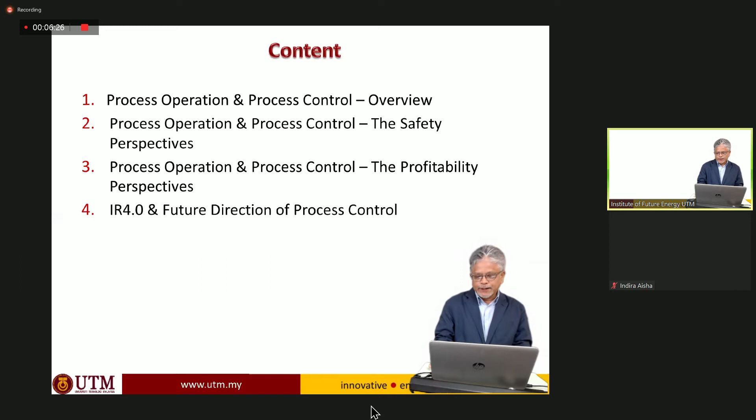Sorry, I got some technical problem, I need to use assistance now. Okay, next.

Before we move into process control, let's define a process. I think you will be familiar with it. A process is basically one where we have input and we have output. Input can be in the form of raw materials, and whatever the output is, we can call it product. To some people it is waste. Waste also has a purpose - some call it waste, but others call it byproducts, because anything that comes out of a process can be reprocessed and transformed into another form of product. The only difference is whether it is economical or not. Then there are processes that require energy, and there are processes that release energy.

So we look at a process in a broad example. In the classroom we look at tank, reactor, distillation column as a process. But in reality, a car is a process. Our human body, our body itself is a process. It consists of many different unit operations.

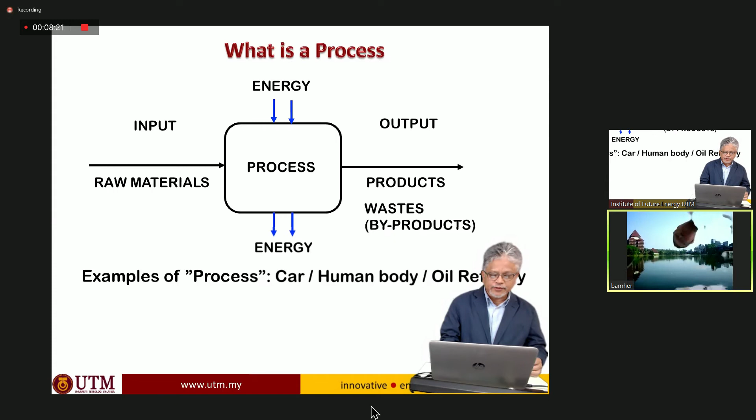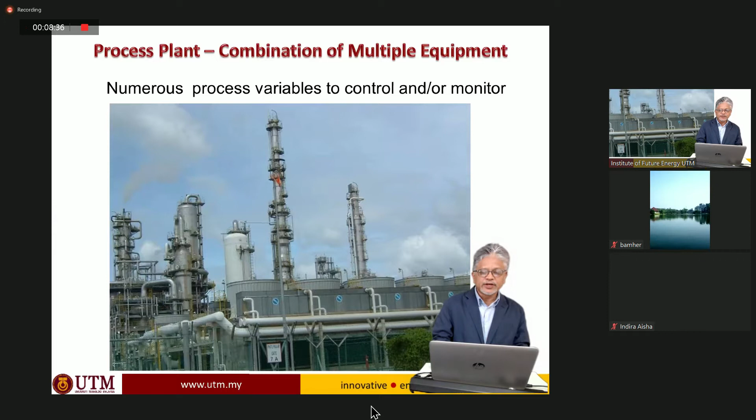Okay. For example, this is a gas processing plant. Complicated, complex, consisting of many different distillation columns and some other equipment integrated together, and all has to be managed.

In a typical situation, the process plant basically has many different objectives. The bottom line is money, but at the same time, the plant must protect people - the plant operation must protect the workers, the people in the surrounding. The plant operation must protect the environment and the equipment. We don't want the equipment to be damaged, and it must maintain smooth operation.

Nobody wants a shutdown. One shutdown costs millions for a process plant, and we need to achieve the product rates and the quality. If the quality is not met, you cannot sell your product, and that is a failure. In order to increase profit, we need to optimize all the first five objectives, and then we have the monitoring and diagnosis, trying to identify if there are any rooms for us to improve the process further.

These are all achieved through process control. Without process control, we will not be able to achieve this. Somebody may say, in the old days, the plant operated without any of this sophisticated equipment. Yes, but in the very, very old days, the plant may operate, but the controller is basically a human being.

It's manual control. Decision is made by a human, a person, then the manipulation is done by the person, so everything is done by human. Then it gradually got replaced by machines, equipment, and today we have so many different digital devices that are used to operate process plants.

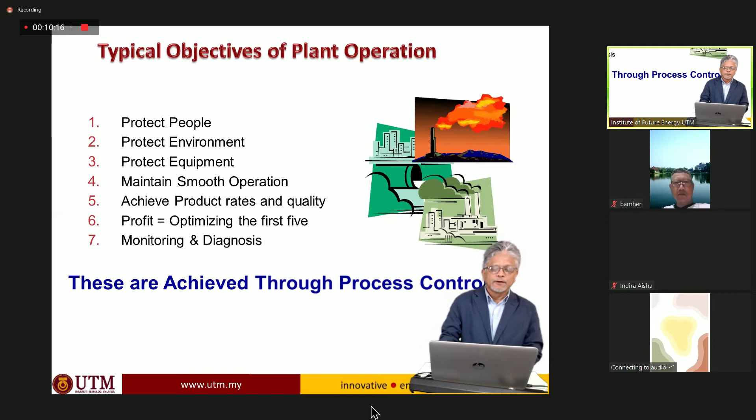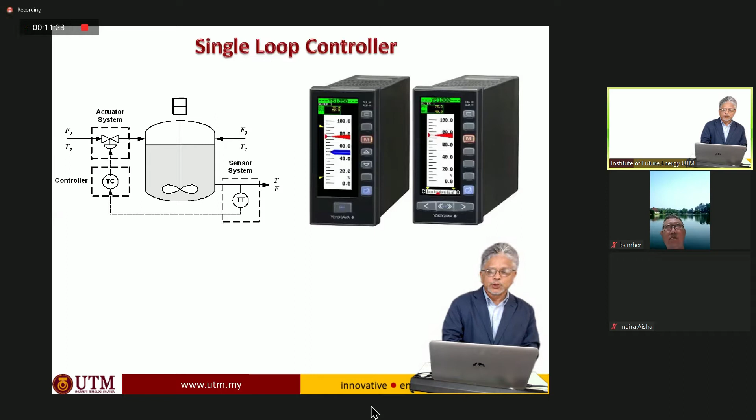Okay, and if we look at how the industry gradually grew, in the 1980s the DCS was introduced. DCS was introduced in the early days - there were plenty of Honeywell DCS, and Yokogawa mostly, then so many different players came into it. DCS is basically a system where there is a common shared communication facility.

We call it a data highway, and then measurement from the process plant is collected and transferred into the data highway, and the information is shared to the host computer, where the host computer will be doing all the calculation, and then we have another computer as a storage unit with different software.

For example, there was software that used to be popular, like one called PhD, and another one called Pi, which was very popular in those days. But today the scenario is slightly different as cloud computing and remote application is growing - we will talk about it later. Then we may also have a PLC attached to the system. So this is DCS architecture.

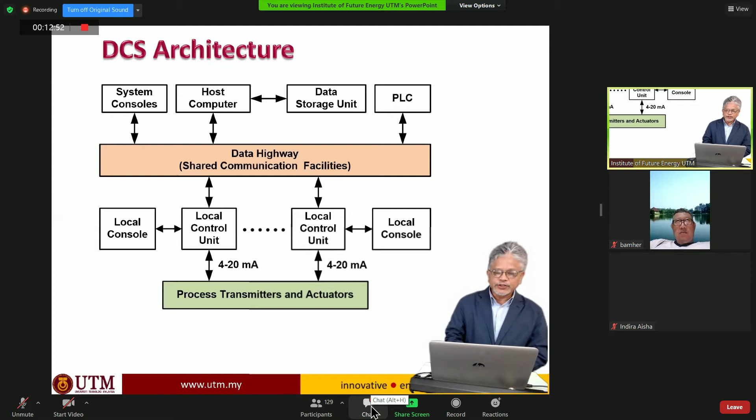And then after that we have a few other technologies developed. We have digital technology - as it developed, DCS transformed into a digital version. This came in the 1990s, first introduced in the late 1980s, but it was slow until the 1990s, when standards were introduced by IEC for functional safety, and for DCS, and a few other standards were introduced.

Then fieldbus application - by the way, fieldbus is basically mostly the product name used by American products. They call it fieldbus, or we can have some from the European side, from German - they call it Profibus. Essentially, it is the same.

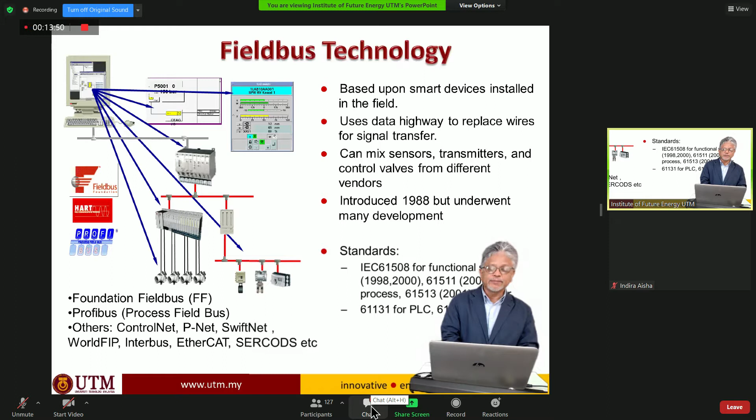Okay, it is basically similar to the DCS. It has the same function, and it has the same shared data highway, but now in the form of digital data, with high-speed Ethernet, and we can have many different local area networks. So if you go to a cyber cafe, we can visualize there is a cluster of computers wired together as one small network, and another wired together as a small network for a large facility. So the process plant may also work that way, where certain areas of the plant are managed through a local area network, and another through another local area network, and the networks are connected together, then sent to the host computer for the overall manipulation or management of the system.

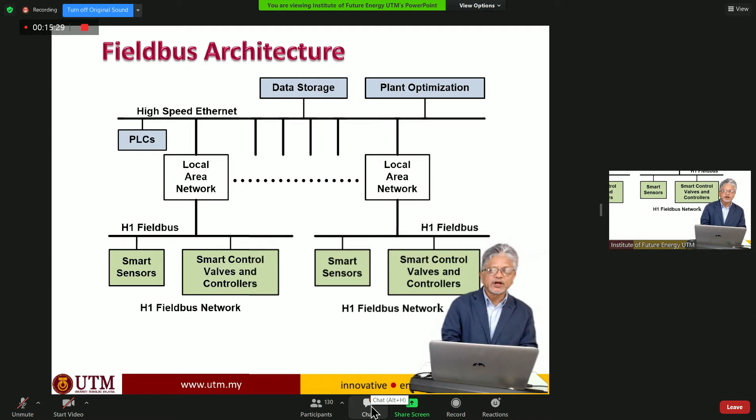So I asked one of my friends once - he was developing, basically installing a new field bus system at his plant. He was a plant manager at that time. I asked him, what is your main motivation to replace the old DCS with the current one? Instead of using the normal DCS, he decided to use the field bus system for his second plant. He was running one plant, so they were doing plant expansion. For the second plant, they are installing a digital field bus system.

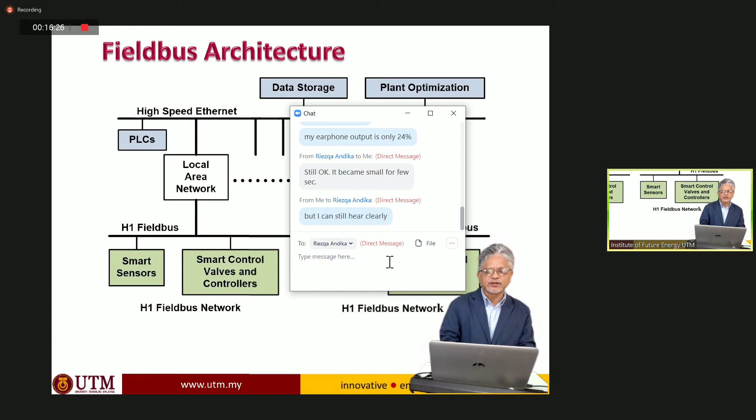Interestingly, what he told me was that when he did his computing, his calculation on cost, they found a lot of saving on wires and a few other things. A lot of saving on wires, because now we do not need so many wires for different measurements, different signals being sent, and so on. Now the wires are all just one computer cable connected to various different devices and going to the computer. Being in that manner, it's easier to isolate the plant, and so it's easier to manage. This gives an advantage to the process plant on overall management, where it can be a little bit easier to have partial shutdown compared to the old system.

Okay, that's basically the scenario. Today, all the new plants, I would say, would use a digital DCS or the field bus or Profibus system. But we do not want to compare this to some of the small industries where everything's still manual. Even today, there are still some with single loop controllers. The single loop controller and the sequence is managed using PLC, and the overall management is done through PC. So PC, PLC, and single loop controller systems still exist in the industry today, even till today. But in sectors like petrochemical, oil and gas, and so on, we are looking at all the new ones with digital DCS, like the field bus or Profibus system.

Okay, now let's look at the safety. Let me see, something is missing. It jumps - the slide jumps very quickly to 3 pages.

When we look at the safety perspective, this is what we have - the typical onion kind of drawing, normally found in class lecture notes. In my class lecture notes, I think I found this original diagram. The idea I took was from the website of a Canadian professor by the name of Tom Marlin, the author of a book on process control. So I like his presentation, and I use it since then.

At the heart of the system is the basic process control system, BPCS, or I put it here as control. So anything on the plant operation, the automation is managing the plant. Control will be making sure that all the process variables are maintained at the desired set points - that's the most important item. We set the set points for pressure, temperature, flow, concentration, and whatever variables we have for the process plant. For all the equipment, for one plant, we can have maybe 100 or 200 different controllers, so many hundreds of control loops, and these control loops need to be maintained at their desired set point of operation. That is managed by control.

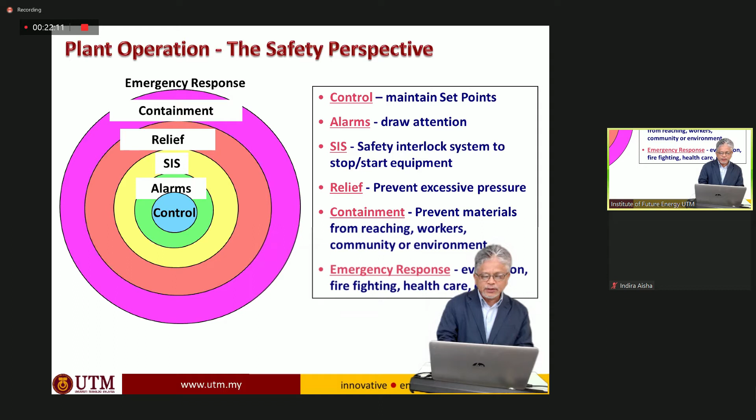So if we look at this example which I've shown earlier, let's say we consider a flash separator, V3. As you all know, a flash separator is basically a simple device, just a tank that receives a saturated liquid. As the saturated liquid flashes into a bigger volume, there is a sudden expansion, and by thermodynamics, reduction in pressure at constant temperature will cause the vapor to vaporize and the liquid to remain in liquid, with the heavier component remaining in liquid.

So we have a separation where vapor goes to the top and liquid goes to the bottom, and the separation occurs in a single stage. In fact, if you look at a distillation column, it can be visualized as a series of many different flash columns. Prior to that, we have 2 heat exchangers, E1 and E2. E1 is basically a process-to-process heat exchanger just to recover some heat. E2 is the utility heat exchanger to bring the temperature to the desired set point.

So if we look at this particular plant, how many control objectives and how many control loops are needed? Okay, let's come to process control.

You know, we are in academia. Every year we supervise students in plant design. They have studied all the subjects in chemical engineering, and now they are building or designing a process plant. So we look at the control loops that they design, and we will find so many loops. I remember one of my favorite questions to my group would be, can you show me which valve will be damaged first? The student will say, what? I don't understand your question. But then normally I will just laugh it off and let them figure it out and tell me next week.

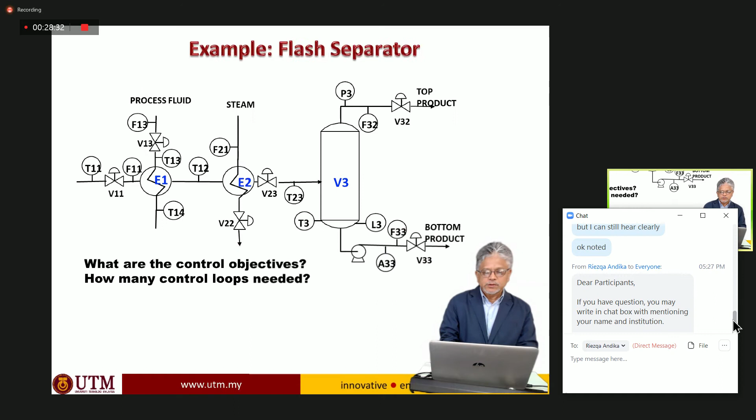Okay, so then we have these 3 things, and I'm trying to figure out what disturbed the cursor. Probably because when somebody is coming in, my cursor doesn't work anymore. Okay, so I'm sorry for that.

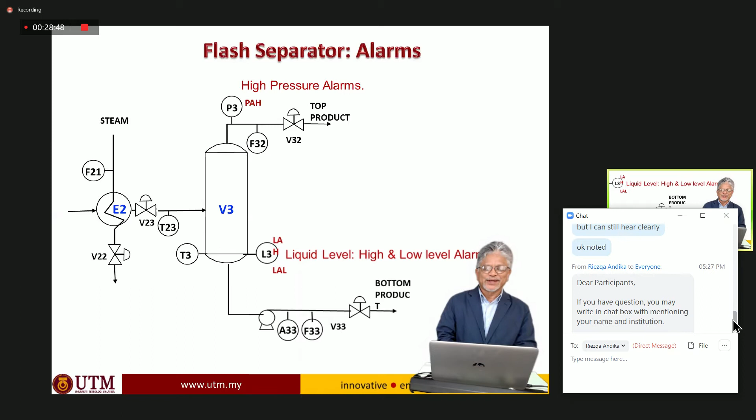So that's the alarm. And at the next level, we have interlock. An example of safety interlock in this particular case is when the level is so low it has reached a danger zone for the equipment in order to protect pumps. So we put a low level switch, and that will basically stop the pump from operating. This is an example of interlock.

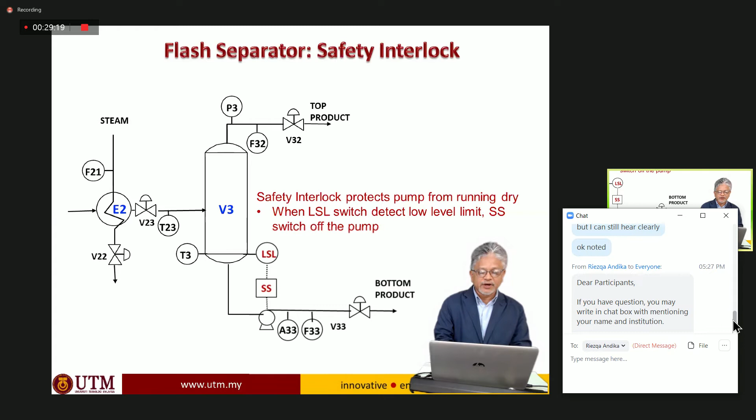Then we have a relief system. In this particular case, we have an example of pressure. So if the pressure is excessive and even the interlock cannot manage it, then we have a relief valve to reduce or prevent the pressure from going excessive and causing potential damage to the system or even potential hazard to the plant as a whole.

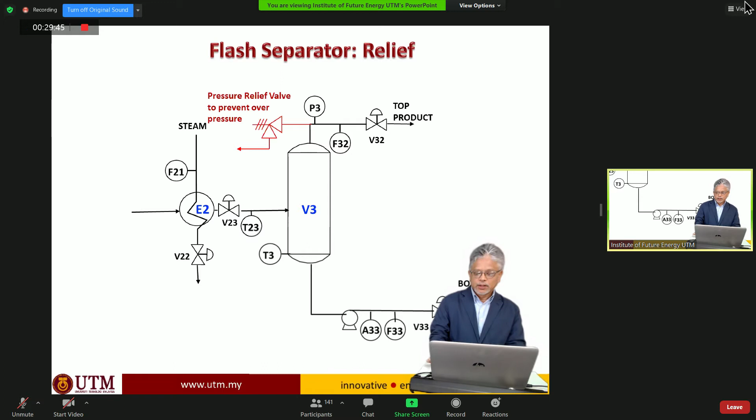So that's basically the layers of protection available in terms of automation: control, alarm, then interlock, then relief. The rest is basically management.

It's a fixed asset, static devices like berm, containment, and shower systems, dispersion prevention devices, and so on, like blast wall, firewall, all those things. And then evacuation as a management requirement to complete the 6th layer of protection.

Now, the current requirement in the process industry is that after the standards of process control were finalized in the 1990s, the industry is basically working on 2 redundant systems. One is managed through a DCS system, which handles all the controls and alarms, and another one which is a system that is operated redundantly.

Ideally with a separate power unit, with a separate backup system for it. The UPS for DCS and the UPS for SIS should be separate. When we do a hazard study for a plant, we need to make sure that we have complete redundancy. The system must be completely independent from each other.

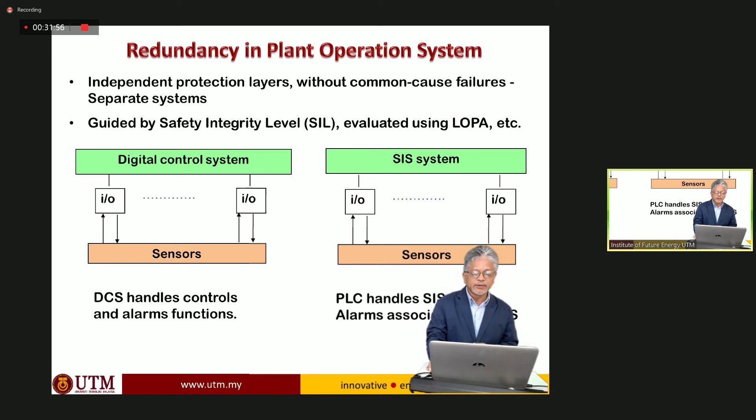Okay, so finally that's the final setup, which is normally used in the industry. Now, for part 3, let me check time. Okay, it's about half an hour now.

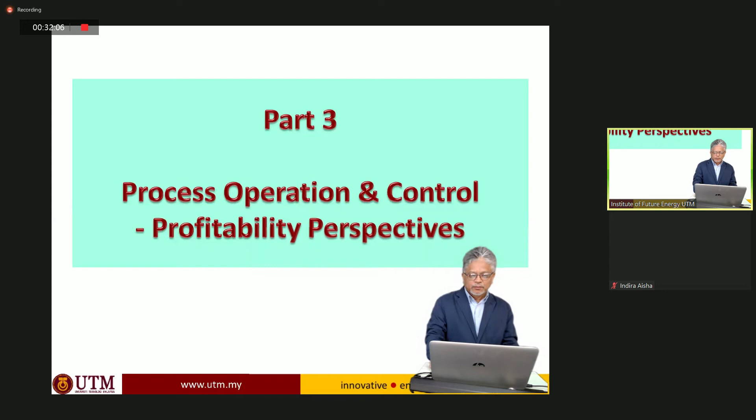Process operation, control and profitability perspectives. Let's look at the profitability perspective. Basically, a 1% saving or 1% improvement of performance is not a small number. A 0.5% improvement is also not a small number when we talk about refinery, because refinery is not an easy industry. The profit margin is not very big.

The oil price, the raw material price fluctuates significantly, and the product price also fluctuates, and these two fluctuations somehow make the oil refinery difficult in terms of profitability. We may have a lot higher profitability margin if our operation is further downstream. As we move towards downstream, the profitability margin will be much better, because the product is generally more expensive compared to the raw material, and the amount normally will be smaller. But this is in the case of bulk chemical processing, like a naphtha cracker or gas cracker. In a refinery, the profit margin is not very big, but a small percentage is a huge amount of money, because the throughput is large.

So when we look at this particular hierarchy, at the bottommost we have the process, what we were talking about just now, the basic process control system, all the control loops. Then at the higher hierarchy we have advanced process control. The industry likes to call it APC, but in academia we use different names: generalized predictive control, model predictive control, dynamic matrix control, adaptive optimization system, and many other names depending on the algorithm.

But generally in the industry, they just call it APC. What is the APC? They say, okay, we use RMPCT, the Honeywell product, or we use an Aspen product, or we use Siemens. That's normally the kind of language or terminology used in the industry, so I put it as APC, advanced process control, which coordinates for better control performance. I will dwell on this in slightly more detail later.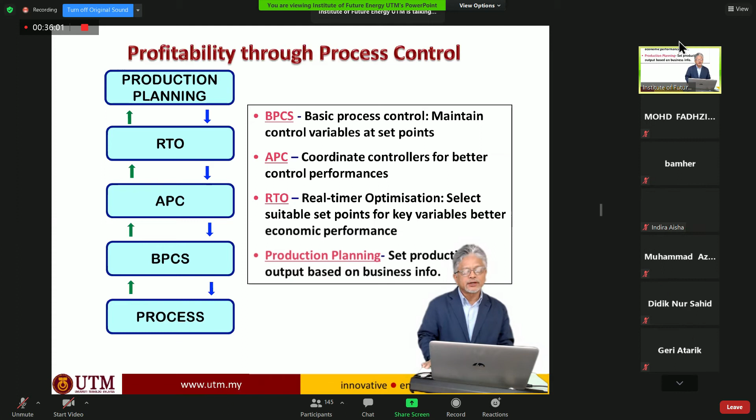Then at the top is real-time optimization. The purpose of real-time optimization is moving from one operating place to another; I will also explain this slightly later. At the topmost is production planning. In the old days, in the 1990s, these were not connected. It was just manual department, manual task. Production planning was done separately in a separate department, and then the requirements or production rates were set by them, and the plant operation people operated the DCS based on the requirements set by production planning. Today, a lot of systems have been integrated where planning and operation work together.

Okay, look at the operating window. When we want to talk about optimization, we look at the operating window. Consider this simplified one; the real operating window is multi-dimensional, so I have only 2 dimensions in my drawing. Just imagine, for example, that pump capacity is one of the constraints, heating capacity is another constraint, maximum pressure is another constraint, maximum temperature is another constraint, and there are many other variables that I put as a question mark.

So there are many possible constraints set by, maybe, equipment limits. If you go beyond this, basically it cannot deliver anymore; it has reached the limit of the equipment, or sometimes it may be a limit of the process. If you go to a higher temperature than this, we may get a runaway reaction, so it's a very hazardous condition. A combination of process constraints and equipment constraints sets the operating window.

And the optimum condition that I put as a pink bubble within the area, that's probably the current optimum operating condition. At that current optimum operating condition, it has a set of set points: what is the pressure, what is the temperature, what is the volume, what is the liquid level for this equipment, for that equipment, and for many other equipment, depending on how large the scope of the optimization is.

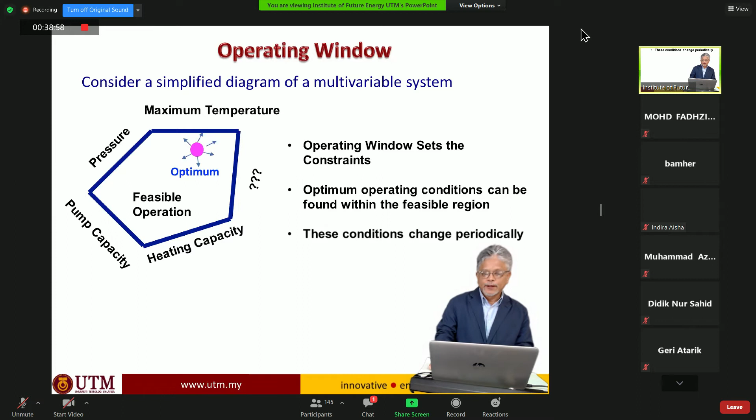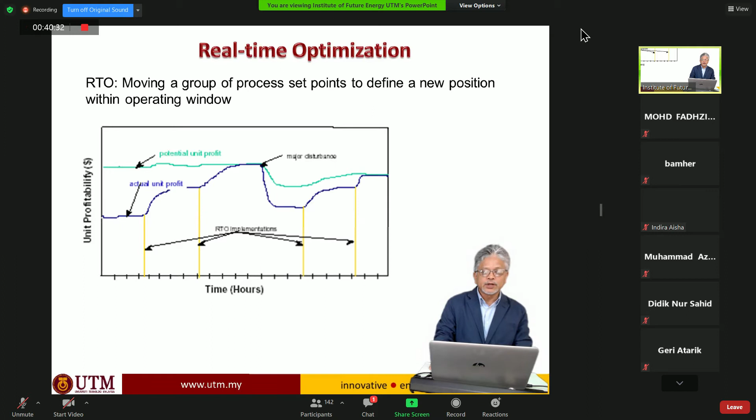So this is the real-time optimization system. It's not expensive because it is just software, but the requirement in order for us to do real-time optimization is that control must be perfect first. That's why if we do optimization, we need to bring the operating condition close to constraints. If we violate constraints, then we are heading for disaster. So we cannot operate near constraints if our controller cannot behave very well with a small deviation from the set points. We need to realize controllers do not work in a straight line.

It is always wavy, and it always fluctuates around the set points. In a typical, normal, straightforward PID controller, for example, the fluctuation may be larger. If we can improve it by using advanced control like model predictive control, then the variation will be smaller. Then we are now confident to operate closer to constraint and therefore increase the profit. So that's why if we want to do real-time optimization, first we need to make sure all our control loops are good so that we can operate near constraint.

Otherwise, we run optimization, the software sets a new set point, and the plant trips. So then we lost money.

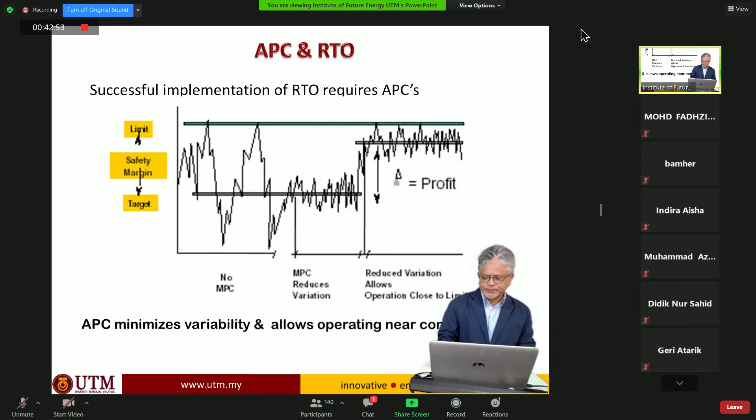In fact, we had some experience in the past with the industry I was working with. We wanted to implement real-time optimization at a refinery, and during the process, when we evaluated the control loops, we decided that for this particular phase, we had to build the APC first. Once we completed all the control issues, only then could we go to the next level and install the software. That took a few years, probably three, before we could ascertain that everything was okay, and before everybody was confident. At that time we were using RMPCT, the Honeywell model predictive control. Then, after having that confidence, only then did they go for real-time optimization, RT-opt, after model predictive control.

This is a subject for anybody doing research. It is generic, and there are so many different names. I remember when I started doing this in the 1980s, reading about it and not quite understanding it. But then in the late 1990s, when I did my PhD, I started to study very deeply into model predictive control. In the end, all those jargons, all those different names, can basically be summarized into something like this.

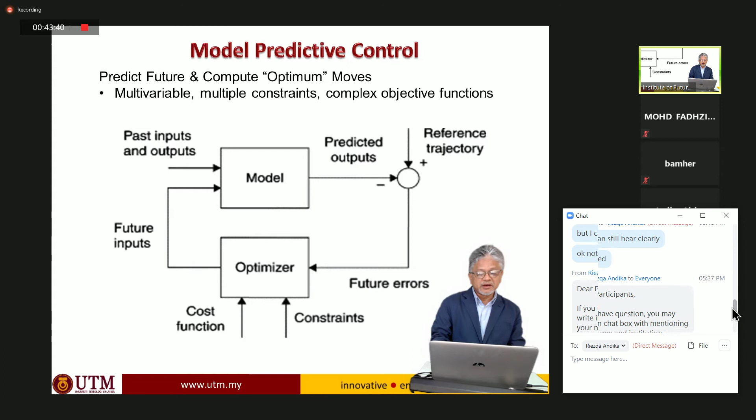There is a model and a process input. The model predicts the future value of the input and outputs. We have measurement of the current outputs, and we can also predict future inputs. Based on that prediction horizon, the input horizon and output horizon, both control and prediction horizon, we can define different controllers.

There are so many different topics in research in process control, in model predictive control, with different names, basically improving certain aspects. Some improve how to switch from one kind of trajectory into a different kind of trajectory. In certain research, people say, what if I use many different models rather than a single model in order to represent non-linearity? Because a non-linear model is not easy to develop when it's large, with many different variables, especially if the variables are conflicting with one another, so it's kind of difficult.

So they came up with an idea: let's do a multi-model system. Some say that if we have many different linear models and put them in a certain structure, they can actually represent a non-linear model. So all those modifications, published as different names of controllers, essentially, in terms of concept, are just similar to what I've been talking about with model predictive control.

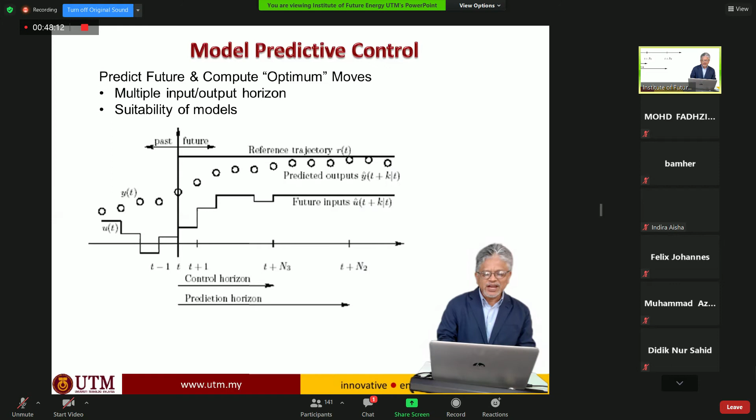So, the future direction - this is basically what I think. You may disagree, because my thinking may not be the same as your thinking. The Industrial Revolution 4.0 will change the world, definitely. It has changed the world, the way our children think, the way little kids today think, and how they can know about so many different things through YouTube, through reading, and so on, very quickly. They tend to know a lot of things.

A young patient in the hospital was listening to the doctor speaking to another doctor and overheard some terms. He quickly Googled them and found, oh my God, I'm going to be operated on in this manner. So he got scared. That's a challenge in today's world.

Similarly, in the process industry, a lot of changes will also occur. If I were to put some keywords in terms of what future technology will be developing today and tomorrow, first is big data. There are so many facility developments in big data. Second is wireless technology, which has improved and enhanced so significantly that we cannot imagine it could be done today. The third is autonomous. Nobody ever thought, maybe 10 or 20 years ago, that this would happen.

But today we can be thinking, maybe one day I go to a meeting driving my car, and then I will tell the car, you go home, and I want to go home with my friend. So the car will drive by itself going home. The technology is capable of this today, but it is not implemented because it will create a lot of issues that cannot be solved today. But who knows, five years down the line, there may be some regulation or other features that will enable such implementation to occur.

Another keyword important for visualizing future technology is simultaneous. The power of computing facilities today and parallel computing has allowed large tasks to be processed simultaneously. So if we combine big data, simultaneous, autonomous, and wireless, and maybe other categories beyond these four, based on these we can imagine there are so many different things that can actually be done.

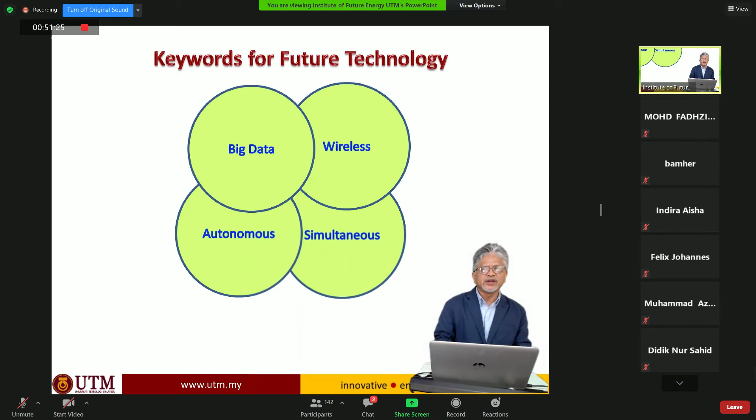Normally, new technology is implemented first in military and aerospace. Military, because they have some kind of immunity if there are mishaps or mistakes, people don't talk about it. Even if they implement something and people got killed, it's for the purpose of national security, so people accept it very well. So they can try new technology quicker than what we do in the normal process industry.

Then consumer products, because they're normally cheap and small. That's why we see pattern recognition and autonomous operation, for example a robot vacuum cleaner, an autonomous system for cleaning the floor. The military can have drones to fight wars now. In manufacturing, we're not yet fully autonomous, but there are so many robots already. But when it comes to process industry, it's still heavily reliant on humans, heavily on the seven layers of safety protection, six layers of safety, and five layers of automation.

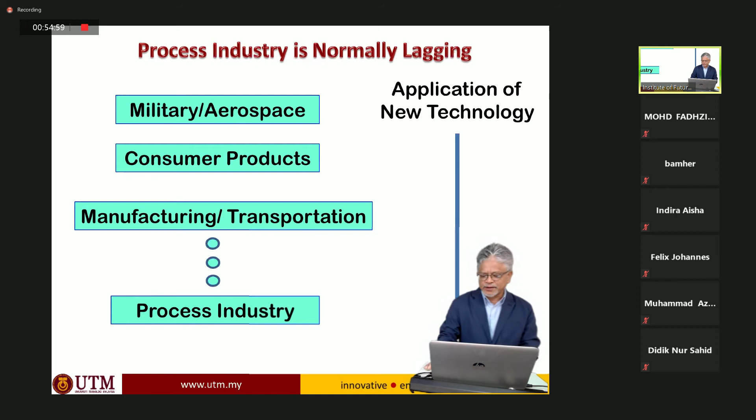So one example of a research theme we may look at is sensor technology, soft sensor technology. Because now we have faster computers and big data capability, we can provide much better estimations.

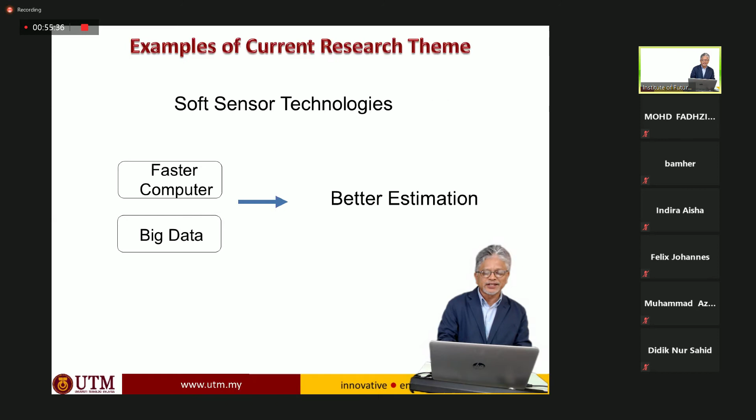So there are so many different approaches that we can do through either model, statistical model, or artificial, various different paradigm or framework of AI can be implemented in soft sensor technology. In the 1990s we had an argument about this, whether you want to have online analyzer or a soft sensor. That was the 1990s, but today I believe people are very confident with soft sensor technology.

As life goes on, the old thing that we enjoy, we never throw it away. So we tend to refine the existing model-based control strategy. Even in 2020, 2021, we see publications in MPC, many different ways to improve it further, how to make the model easier to fit for the industry. That means using fewer variables, making it more accurate, and so on.

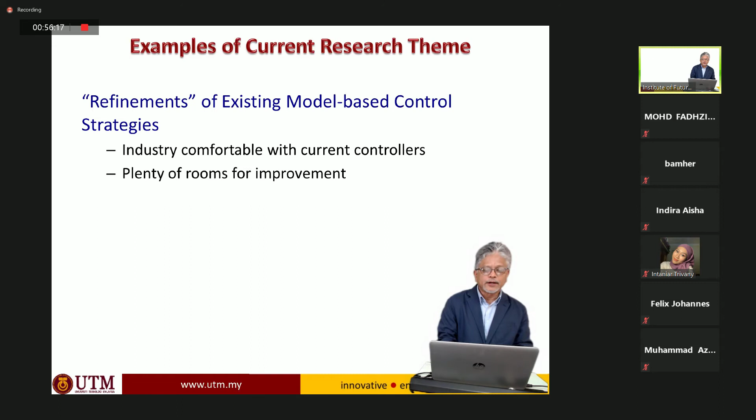This can also be researched. Another interesting topic will be reinforcement learning. Reinforcement learning can be seen in many different ways because it is a broad subject. When we talk about reinforcement learning, people talk about dynamic programming, Monte Carlo simulation, and a few other different methods. How can we adjust? There are many approaches to reinforcement learning.

It can also be visualized as in dynamic programming, fitting the model online and improving the model, letting the model learn about the behavior and adjust itself along the way. In the past, it was not possible to do so because of computing limitations. Today, because of the power of computing, this has become slightly easier. So we see quite a lot of publications on reinforcement learning these days.

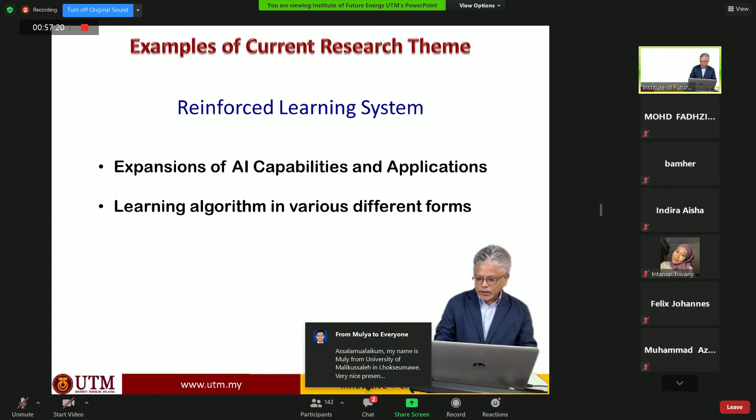Then, man-machine interface. The last topic that I want to talk about is man-machine interface. This is a very interesting subject. In the 1990s, when I started doing research in process control, there was a lot of man-machine interface research at that time, in Purdue and in Lehigh University in the US, talking about what's the best color for an alarm, the sound of the alarm, what kind of diagram is suitable that can make the operator alert but not so crowded, and things like that. Today, when I talk about man-machine interface, it means more than that.

The interaction between machine and man. For example, man can override the machine. That's normally the case. You have an interlock, and somebody with a key given by the management can turn on the key. We can override this interlock because this interlock can cause unexpected damage. We better loosen it up a bit, and adjust. So that can be done.

People can adjust the set points. The controller works at a certain set point. So we want to beat the controller - go faster. I cannot make it faster because the algorithm is fixed. So in order to make it faster, I just increase the set point higher, so it goes a bit faster. Then I reduce the set point lower again, so that it becomes normal again. So I got a faster response by basically cheating the machine - cheating the machine by putting a higher set point, which I do not actually want. I want a lower one.

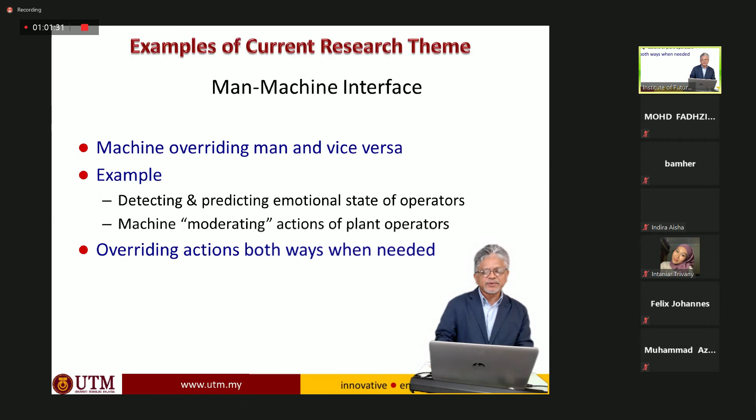So the balance between the two probably can be studied as an interesting topic for future.

As my final note, which is very interesting to me, if we study the theory and practice gap, we always talk about theory and practice needing to interact because they are related. But if we look at process control in the process industry, in the 1980s we already had model predictive control published and tested on a simulation basis, understood and refined. The DCS was introduced in the 1980s, but most implementations came in the early 1990s. In Malaysia, it was more mid-1990s when DCS started to become popular within the petrochemical industry. So MPC and DCS were both introduced in the 1980s.

Then we have fault detection and diagnosis in the 1990s, real-time optimization in the 1990s. But MPC came to industry in the 1990s. So there was a lag of about almost 10 years.

At that time the technology was matured, and in the 1990s and around 2000-2005, the gap between theory and practice became quite close. We do research in model predictive control, and the industry also talks about model predictive control. We talk about how to develop the model, they also talk about the problems in the model. So we could get along very well discussing our current research findings with industry, and industry could understand our research quite well.

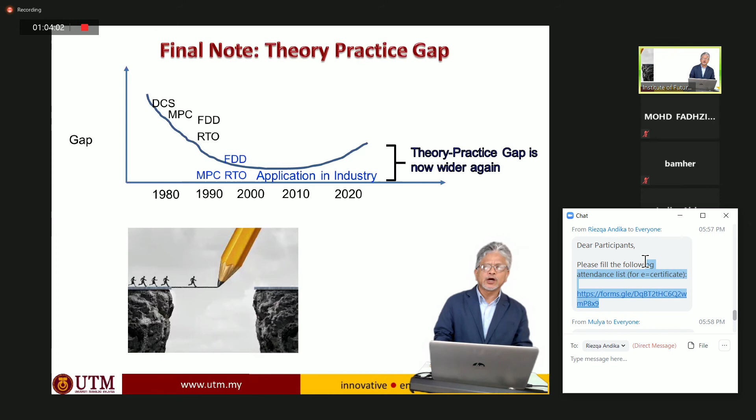As we go on into 2010, 2015, 2020, the development of computing has made our research go very deep into algorithms with large-scale data and so on. So the gap between current technology implemented in industry and current research work done in academia is becoming larger again. We have this widening theory-practice gap. This is an interesting observation, at least for the process industry, because in some other industries they can adapt very quickly with current technology and make use of it quicker compared to us, because we tend to be laggards.

So finally, as a conclusion - I already took about 1 hour now for my talk. I'm sorry for this, the slides extended. It's kind of difficult because there's nobody in front to tell me what time it is.

Okay, sorry for that. So as a conclusion: number one, advances in ICT will expedite changes in process control technology, so we will see a lot more new products which are more advanced. However, the process industry is considered conservative because changes require big investment, and if failure costs a lot of money and can even cause a lot of damage - imagine if it explodes, it can cause bankruptcy because of the following liability to the environment, to people's lives, and so on, which can be very large.

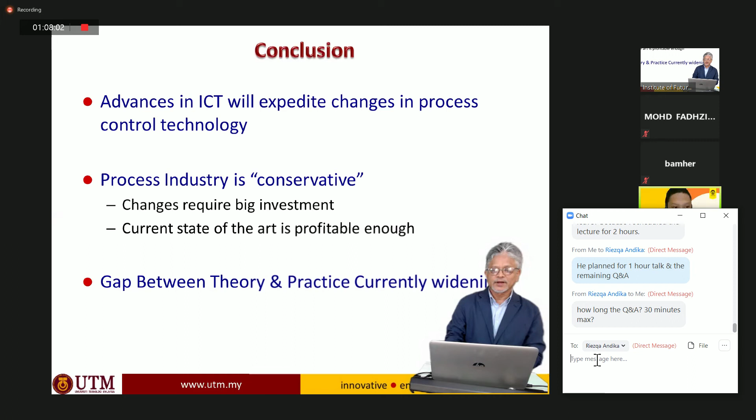Thank you very much, Prof. Riezqa. Okay, thank you very much, Professor Arshad. Time flies by, I really enjoyed the presentation very much. It's more than 1 hour, but feels like 30 minutes or less.